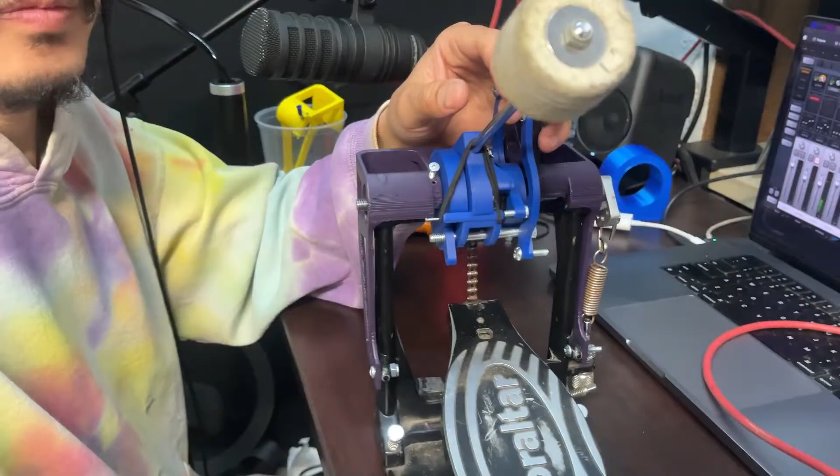Hold on, let me get further away here. So when you press the pedal down, the beater swings forward and hits the skin of your drum. And on a regular kick drum pedal, if you hold your foot down, the beater stays pressed up against the skin. That's not a big deal, but it does kill the resonance of your kick drum, so if you want a big boomy sound, you need to practice not doing that.

It's called burying the beater, when you play and let the beater rest on the skin. And actually, as a drummer, I prefer burying the beater a lot of the time. It just feels better.

But what if you don't always want to bury the beater? What if there's a way we can make it so you simply can't bury the beater? It turns out a piano key does exactly that.

When you press down on a piano key, it launches a hammer forward, but allows the hammer to bounce back after it hits the string. That's why when you hit a piano key and hold it down, the note sustains, and it's not until you lift your hand off the key that it dampens the string again.

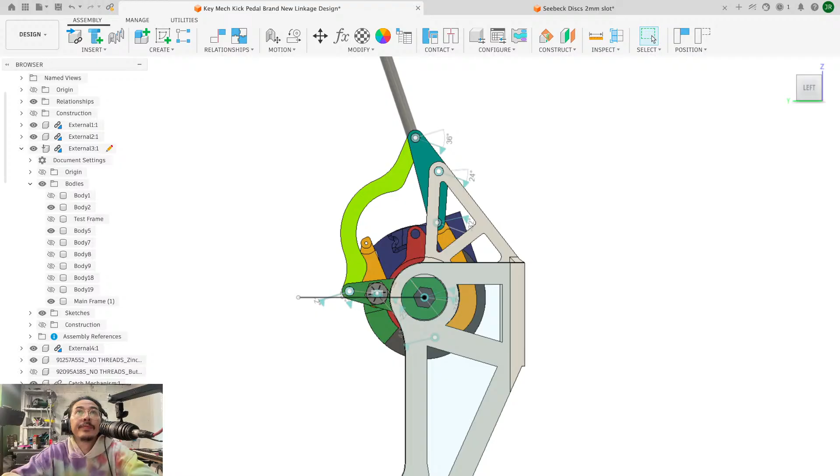Okay, so this is our mechanism. I think I'm going to print all the parts in different colors so I can refer to the colors when explaining it. I think that'll make things really easy, but I want to pick colors that look cool. I don't want to just do random colors like this. Like I feel like red for this makes sense. Anyways, so the first thing I need to do is dampen this guy.

I think literally all that's happening is this guy's just bashing into there, so we just need to put a little bumper on this.

Oh, and actually while I'm here, I can show you - oh my gosh, so messy. I'm still in the middle of cleaning all this, but that's the new printer station, that half of the room now. That used to literally just be garbage and stuff I would trip over. But now that's going to be a new manufacturing station, so all the printers are going to kind of live over there. I might keep one behind me at all times, but that's going to be the major workhorse part of the shop. And then we have the laser there and everything too. There's a little cubby here where I have another printer, but I'll probably put maybe a filament closet or something in there. But yeah, it's coming along. This desk is so nice, I'm so happy with this. It's super, super sturdy, it's got a stone top, so having all that mass underneath is really helping with keeping things stable.

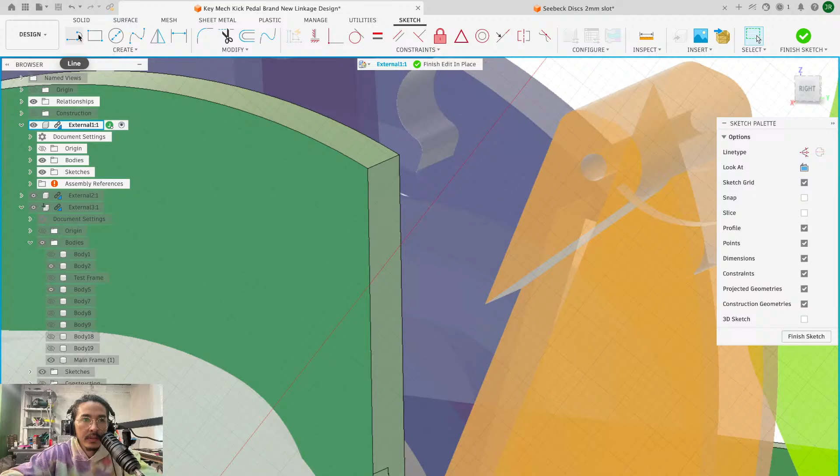Okay, sorry about that, I got a little bit distracted there. So okay, there we go. So I basically want to just add a pad here, but I don't want to just do a straight up thing. It kind of has to be... I want to do something that looks good too.

That's one of the things I've been really working hard on, trying to make things look better, because I feel like my designs have suffered in the past, or my videos have suffered in the past because of things not looking that good, which feels dumb, but I get it.

So, thinking, why is this in this shape anyways? I feel like this shape is actually kind of dumb. It doesn't need to be like that. Realistically, this could just be parallel.

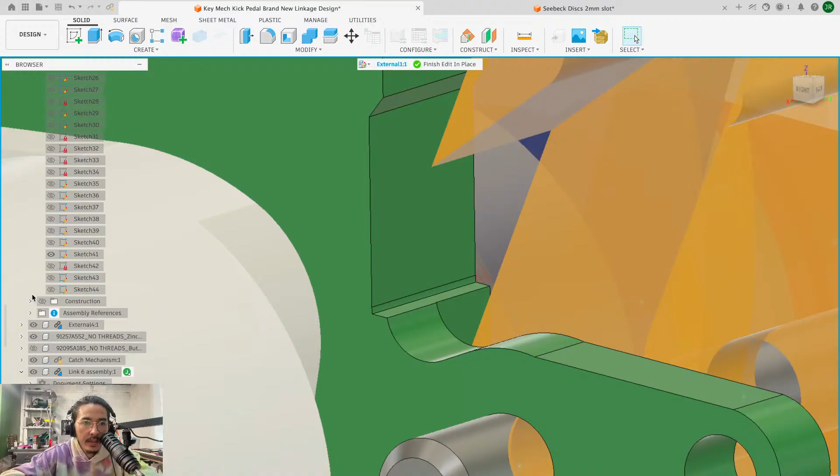Oops, what? Oh. Huh. So confused, what's happening here? Why is my sketch not showing up? Oh, oh. Boom.

I need to get better at this. I need to get better at this software.

Okay, we can pull that back. Feel free to keep chatting.

Sometimes when I'm working on this stuff, I forget to talk. So, I obviously want this to be fun to watch. Don't want to just be doing this.

Dun, dun, dun, dun. So I'm kind of thinking something like, oh no, I need that corner to be - I mean, literally just basically, I'm thinking about just making this little nubbin soft.

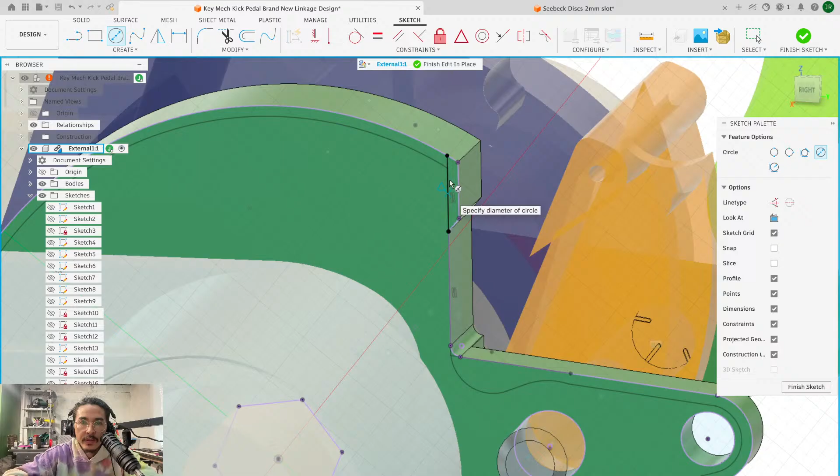Maybe we do something like that. So it's going to be this whole section, and we can tie this in with... actually, I should make it almost removable, shouldn't I? No, let's print it all in one. It's easy enough. So if I extrude...

Okay. And then I extrude this again to there, make that a new body. And then change the color of it to red. So there's our first pad.

Now, what I was saying before is I think I need more than just a solid pad, because my soft material isn't that soft, and it prints flat on its back. So I think I'm going to add maybe like ribs to this.

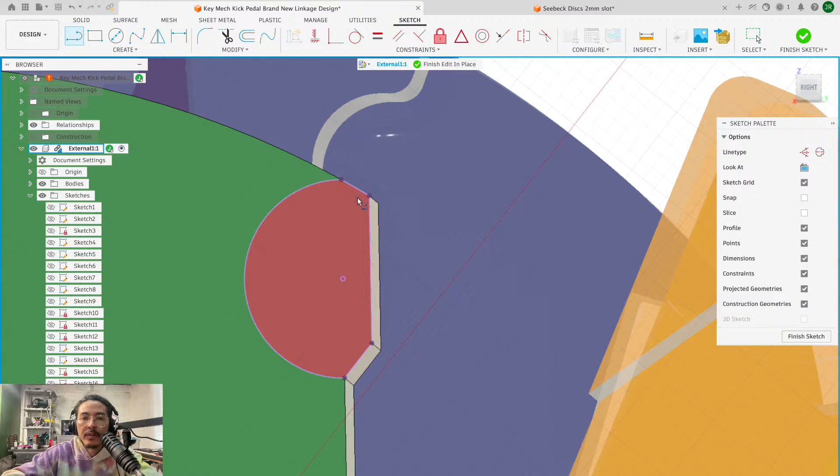Would it maybe be better to be modular so you could try different things instead of having to reprint the whole thing with multi-material? It would be better, but I want to demonstrate the multi-material printing. That's one of the benefits of doing this - I can show off the multi-material capabilities. And this piece prints in like 15 minutes anyways.

Obviously with multi-material it would take a lot longer, but I think it's worth it to demonstrate the capabilities, and I want to experiment with how this multi-material stuff works. But in the real world, I would totally make this a separate thing that slots in so I can change the pads, and redesign this later. Actually, you know what? Let's do it - let's make it so it can slot in. I'll still print this in one go, but in reality I'm going to do this in two separate pieces. This is Fusion 360.

I like it, it's not free. I have a hobby license that I think was pretty cheap - I honestly don't remember how much it is. I think it's like $50 a year, but that only lasts for 3 years, and then after the 3 years you have to get the pro version, which is insanely expensive. It's something dumb like that. And they changed it - it wasn't always like that. Fusion 360 used to have a straight up free tier that anybody can use, and then they took that away.

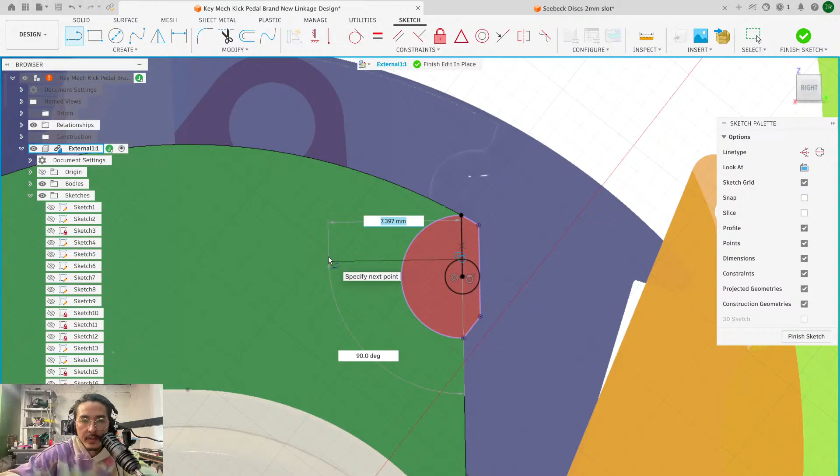I'm thinking about doing kind of like - I want something that looks cool, you know what I mean? Like that looks kind of cool to me. I was thinking about basically doing something like this. Something like this. And then something like this, maybe. And then something like this, maybe. This all makes sense in a second, I promise. And then something like maybe that. And then something like this.

Holy cow, stop texting me. I have a real estate agent that texts me all the time. Okay.

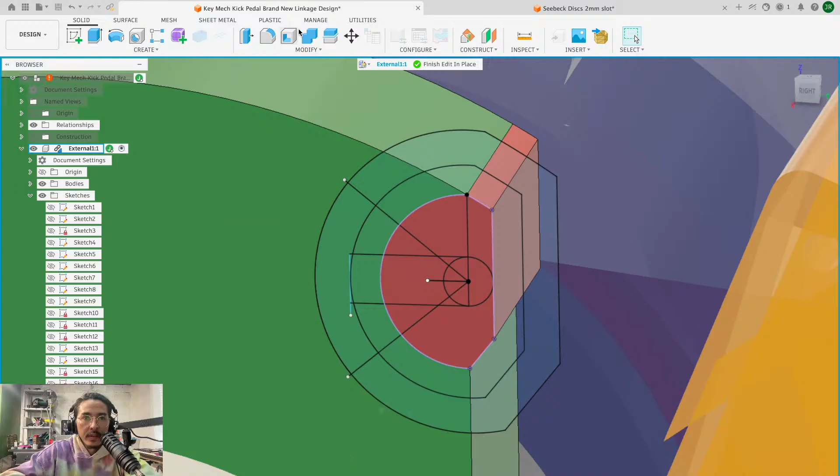This might be dumb, but we can try it - we can always change it if it doesn't work. And then combine this with this. Sketch away, so something like that. And so obviously that should be able to slot in and out.

Let's do a - let's start with minus 0.5, like that, and then maybe come straight up here. And then like 0.7. And then, I don't know, that I guess. And like this and this, like that. And then this.

Wait, actually no - but that's kind of the shape I'm looking for. Let's take these. Oh, that does not work. Okay, that's okay. So we're going to come forward with that. What's our distance between these? Ooh, 4.565 mils - that's a dumb amount.

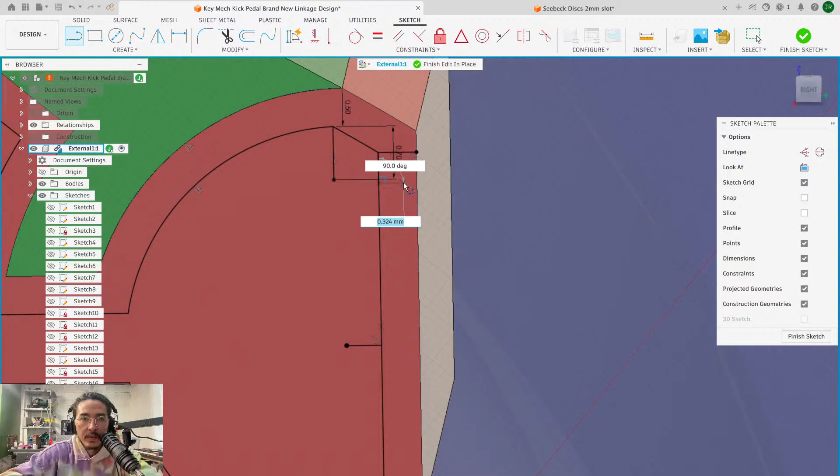.56 mils, hey? Well, let's create a rectangular pattern.

Hello, mother-in-law. Common guests on this show - my wife and my mother-in-law. Very sweet.

So what was it, 4.565? Oh, but minus. That doesn't work. .65? Oh no, 4.065? Okay, I'm just going to eyeball this because let's be honest. .16, I guess. Okay, and then let's do 7 of them. Okay.

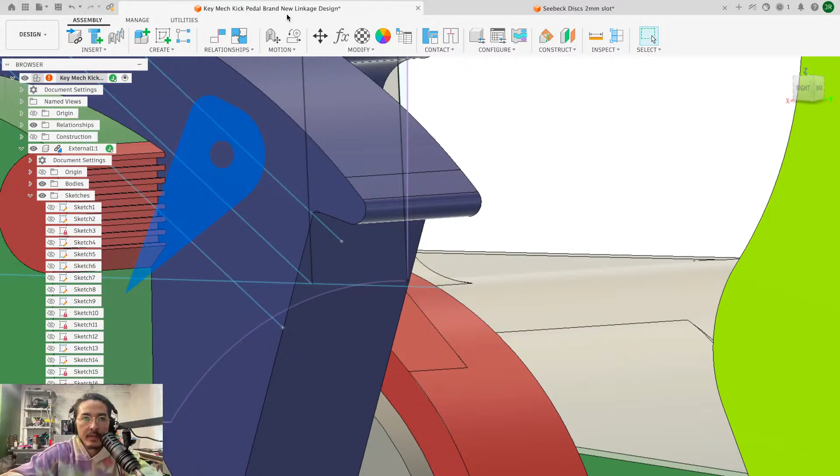One of the things I wanted to try with this was just really reducing this as much as possible. So one of the things I was thinking is first let's fix the jack. I think one of the things I'm going to do is just get rid of the chamfer altogether. And maybe make this - oh. No, okay, never mind.

Maybe fillet this, like that. Okay, so now we just have a really sharp edge right there. Actually, we should probably keep it like this. Maybe I can do a little fillet on this. Yeah, something like that.

Okay, and then I'm just going to play around. What I'm actually going to do is... So one of the things right now, this guy bumps into this screw, and I want to play around with that.

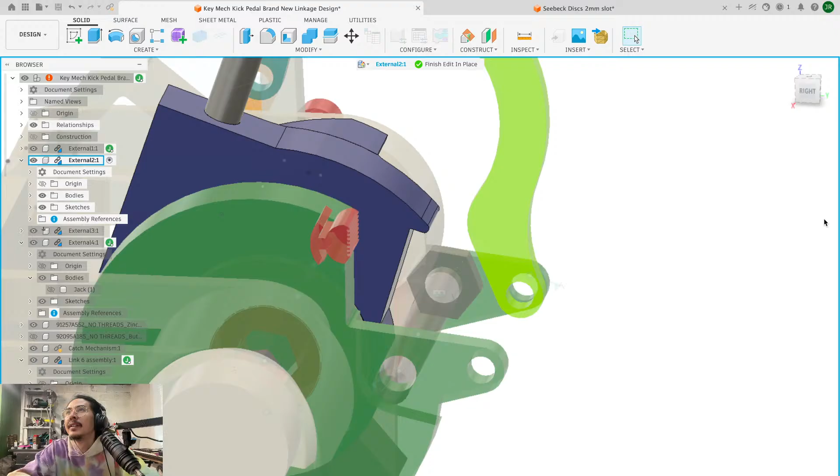There's my wife. There's my wife. Is that a bacon? Is that a bacon? I can't tell what that is. It looks like a bacon to me.

So yeah, what I want to do here is I want to actually grab this, create a copy, move it out here, and adjust this a bit. So let's bring this in. It's not going to let me do that. Okay, great. Love that.

Can I get rid of this? Yes. And just add a fillet here. Let's make it small, right? Let's see what just making it small does. Tiny little guy.

And then, in order to make it maybe not bounce back as far, because right now it bounces back and hits the screw here, I guess what I can do is just print a TPU bumper that goes on the screw. Then I don't have to change this at all, which is nice. So maybe I'll do that.

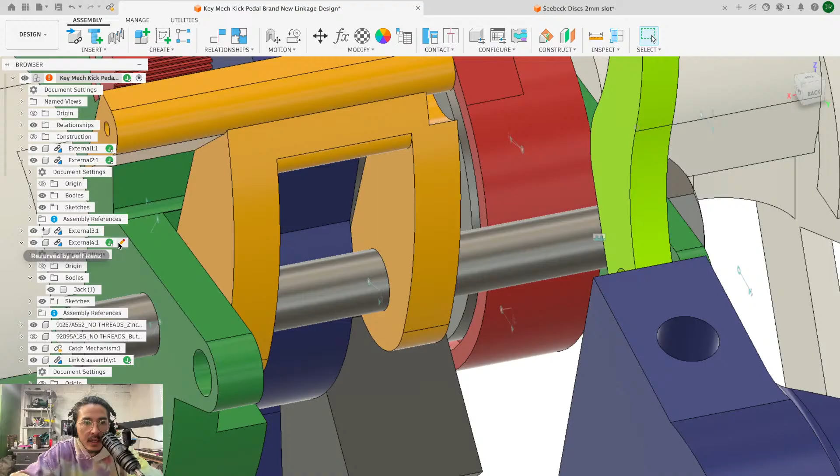And I'll create a sketch here. I'll project that. Let's make it maybe 10 mils.

Can't really do that because the actual thing needs to rotate. Okay, so I can't do it on the bar. Well, actually I can. So here's what we're going to do.

We'll do another multi-material thing. Just, you know... no, that's going to print dumb. That's going to print dumb. I don't want to do that. Okay, we're going to not do it on the jack.

We are going to do it on this guy, because the bolt sits right up against this. It's real close. So I can't add anything to the bolt because it'll get in there. But I can add stuff here, at the point that this actually contacts the bolt.

Let's hide some of these sketches. These sketches are getting a little unruly.

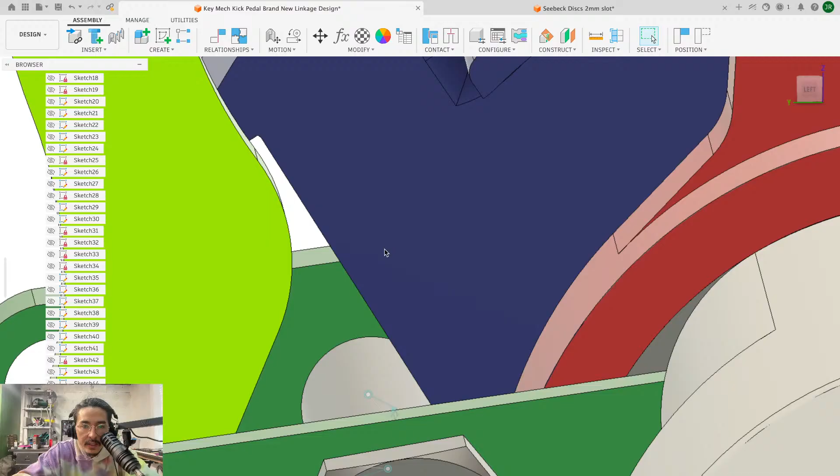Okay, so the point that this jack, the point that the jack actually hits the screw, I can't see. Or the point that the butt actually hits the nut, or the bolt here, is right there. So that's back pretty far.

And at this point in the stroke, we would have basically hit the beater already. If we moved this forward slightly, okay, let's actually go to here, which is where it re-engages. So we can pull this forward, maybe to there. That's probably a good amount.

So, what's our distance here? 2.362 millis. Kind of downward. So if I did 2 mils perpendicular out from there, that's probably pretty good. I mean, I'll do 2.2 just because I could probably do a little bit more than that.

So we'll sketch here. There. Okay.

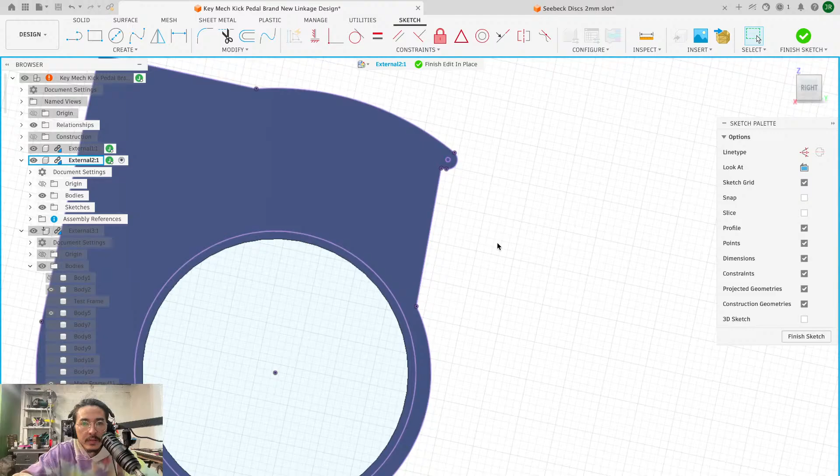Okay, so that gap. Nope, that's not what I want. Okay, I'm overthinking this. We can kind of just make an educated guess here. At the point of contact, it's going to be right there-ish.

So let's put a nice little bumper on this. I think I could probably do just a little circle here at like 4 mils.

You know what? I'm going to do something a little bit crazier here. So I moved that. I'm going to drag.

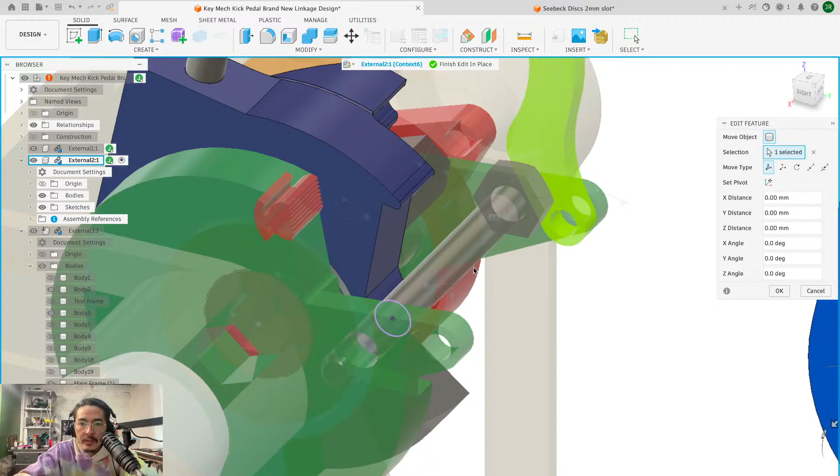So I want to do a sketch on here. And I want to project that there. And then I want to go to the move. And I want to also select. Okay, I can't do that.

So let's go before the move for a second. And I want to extrude this out here. Okay, and now when I go to the move, I will also move that there. Now you can really see where that's gonna be.

And if we sketch here, project this, get a circle there, now we can see exactly where it's going to be contacting. In fact, yeah, and then if we go like this and just take a random point here, we want to come out 2.2. And then come straight down.

Okay, so that's where it's going to contact. So it's like right at this base point. So what do we want this contact point to look like? I feel like it doesn't need to be that big. And we can probably do something

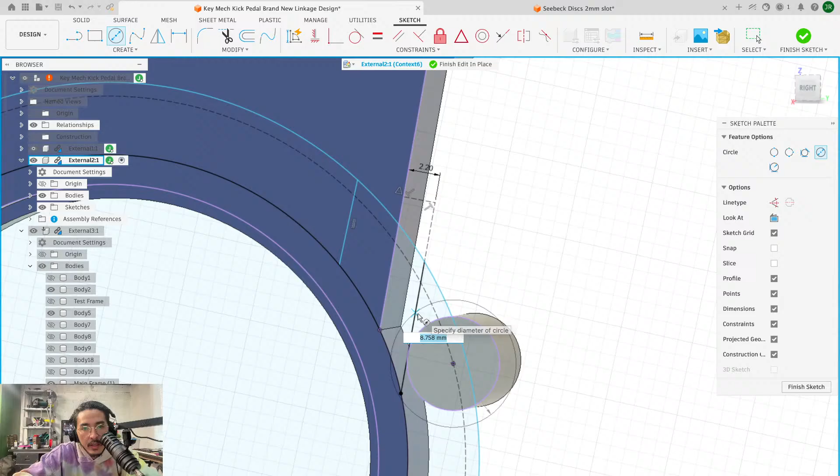We actually don't need this straight line because I think I want to make it cup this, kind of cradle it almost, because I think that'll be quieter. We can try something like that. So something like that to grab it, you know what I mean?

And then to lock this in, well, I think we can do something. Oh, oops.

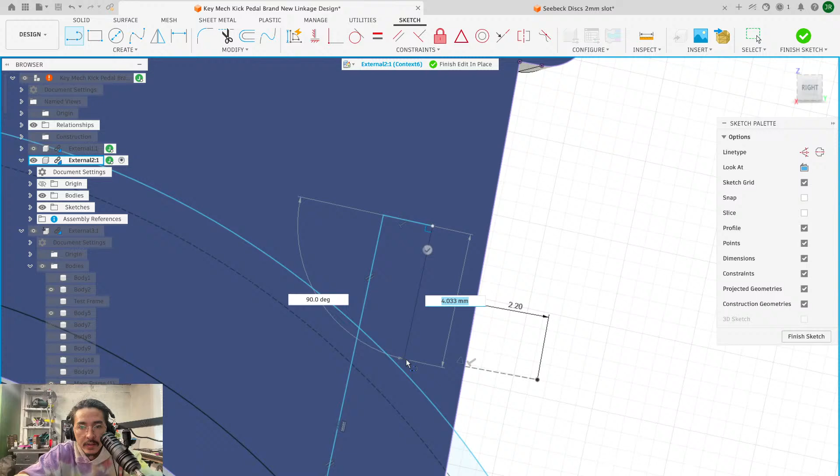I mean, I can literally just come up a bit, come out a bit. Looks a bit crazy, but what does it look like when we add our bumper?

Okay, and then I think to make this properly quiet, we can just do like this kind of deal. So that'll absorb a lot of that energy. That'll really kill the momentum, which is what we want. Right, we can try that. That's a nice little bump.

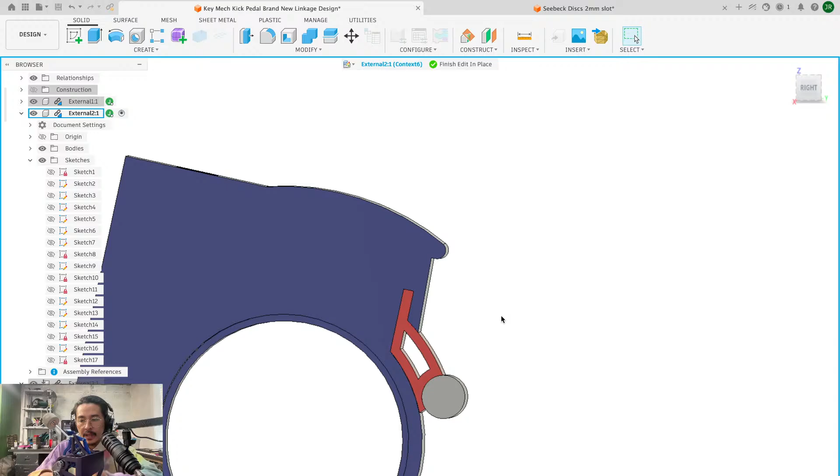I feel like we are going to be getting a little bit of noise from the jack hitting there as well, because... No, actually we shouldn't, because it doesn't actually ever hit that. Yeah, we're good. We're good there.

Okay, so this one's done. And then when this guy, when the red guy engages with this, I kind of want to be able to adjust this. So I'm going to delete these fillets.

Oh, what am I doing? I need to be doing this guy. Come on, you got it. You got it, dog. You got it.

Instead of... wait, how do I get rid of this chamfer without just deleting this whole thing? I guess I can go with a sketch on this, project this.

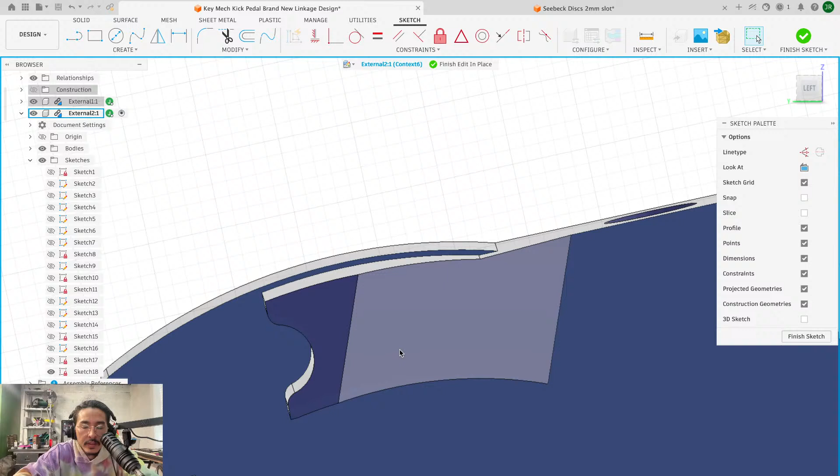Okay, and then extrude this out to here. New body. No, I see what's happening.

Oh no, wait, I messed up. Project this. I want to carry that circle. There. And then we can finish this sketch, extrude this and this out all the way.

And I'll create another sketch. Oh, my neck.

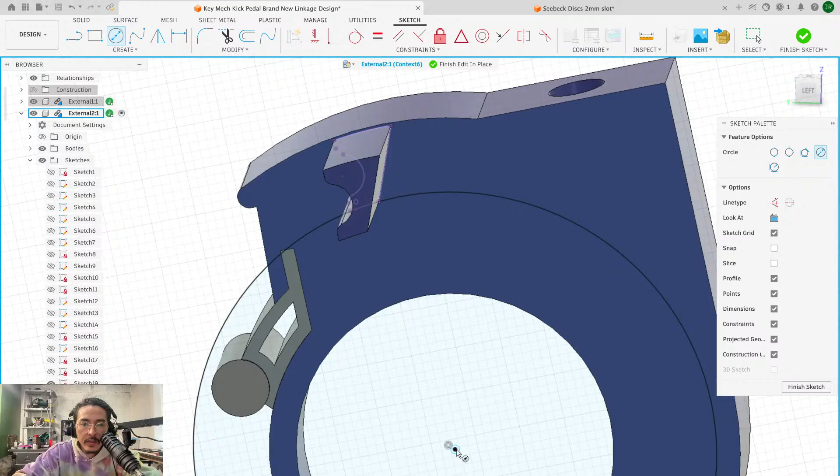So I think what I'm going to do here is make this one piece.

Oh, shoot. Oh, something hit my roof.

Okay, so this will be a bumper as well. Boom. But we will use a screw to be able to push this forward and back. But how do I use a screw to push this forward and back along this arc? That's what I need to figure out. Maybe...

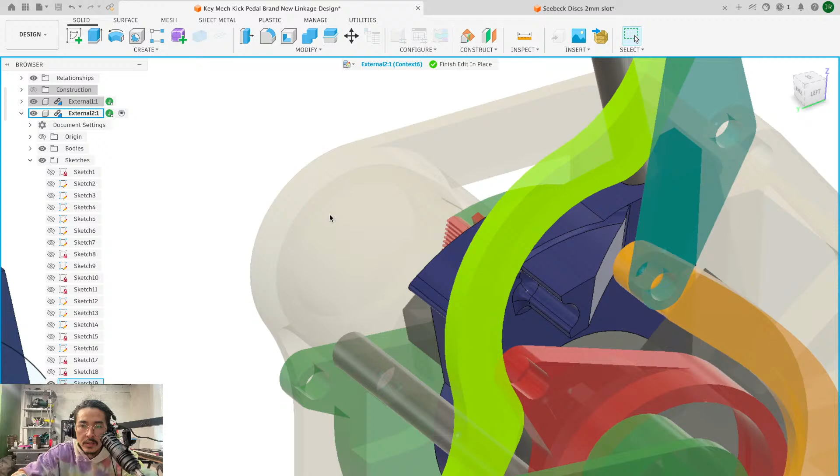Actually what I can do... oh, this is gonna be nice. This is gonna be nice. So I'll do, yeah, this is gonna be really cool.

I'll sketch on here. Let's project all of these things that I did already. I'll create a little track in here. 4mm track. What's this distance?

1.8 versus this distance, 2.1. So if I make this just 2, oh yeah. Oh yeah. This whole thing is gonna be...

Okay, and then I take this and I go like this, and I go and extrude.

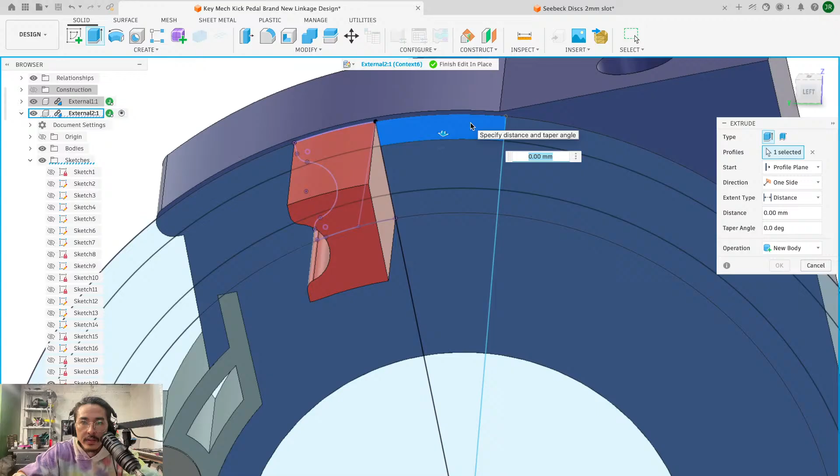Come on, let me select just one. Yeah, there we go. There you go. There you go. There you go. And I extrude this out. Let's do it, 2 mils. New body.

Wait. And this. Actually, how far back does that go? That one goes really far back. Okay, so we can change this angle to that.

Finish. This. Target body, tool body, remove, keep tools. Okay.

This is going to make sense in a minute. Boom, boom. Then we take this whole circle, extrude it. We go minus 0.5.

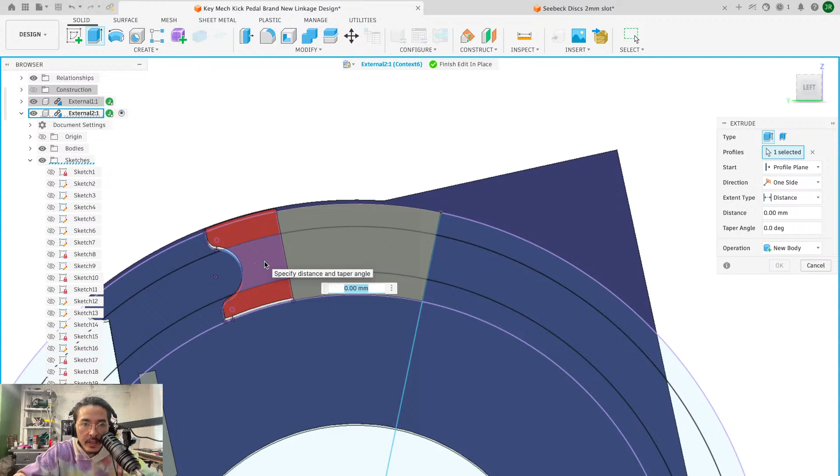Should I do minus 1? Let's go minus 1 on that. And then I take, and then I go extrude this, and, oops. This, and this. And then we go minus 0.8 or 0.9, I guess. New body. Okay.

And then I go like this and extrude this out to here. New body. Okay. Oh, shoot. Sketch on there. Project this and this. Extrude this out to here. New body. Combine these two. Boom, boom, boom.

Throw a little fillet. Oh, wait. What? Combine. Boom, boom, boom. Don't keep tools. Okay, there we go. Do a little fillet here. Do a little fillet here.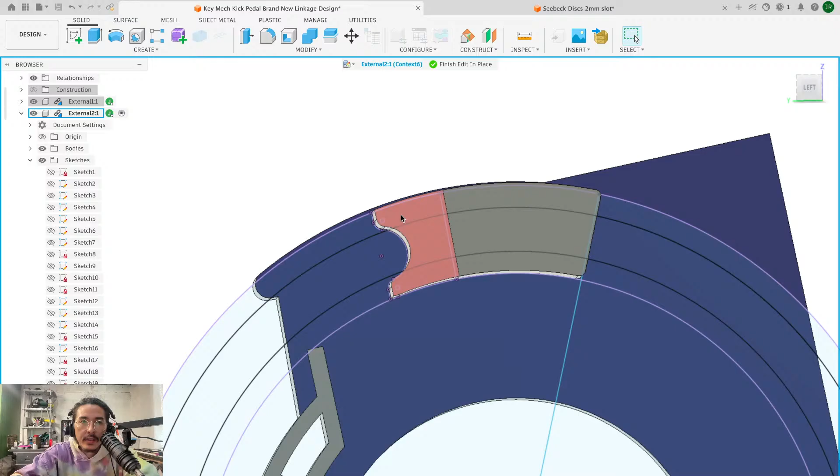And then we do a sketch on here. We draw a line up from this point to, I guess I should do this to here, and should be 1 milli. Nope, 2 millis.

Yeah. And then we go like this. And we go 4.7, I think. And then we go like this, 4.7. And then we go like this, tangent, and this, tangent,

Finish, extrude this, to there. So now we have this slot. So I'll be able to send a screw through, and I'll have some adjustment in this.

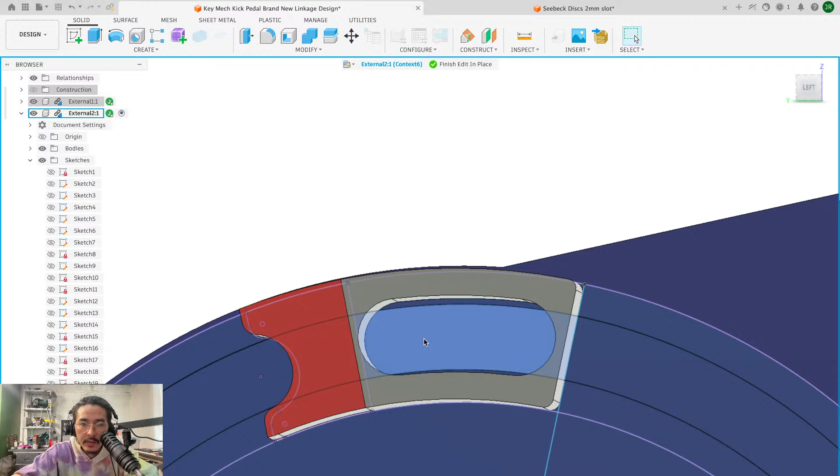Oh. Oh, I should have gone all the way through to there, but I don't want to cut. Oh yeah. Okay. Did that work? Yes. No, it didn't. Because I need these two to be combined, which I haven't done yet.

Nice. And then we can go and extrude again. Take this circle only. Go all the way through this.

So now I'll be able to send a screw through this guy. The little channel allows this to stay oriented correctly, and then the screw will hold it into place, and I'll be able to move this along this arch a reasonable amount. So I can adjust this, because we need to adjust this. This will be Multi-Material.

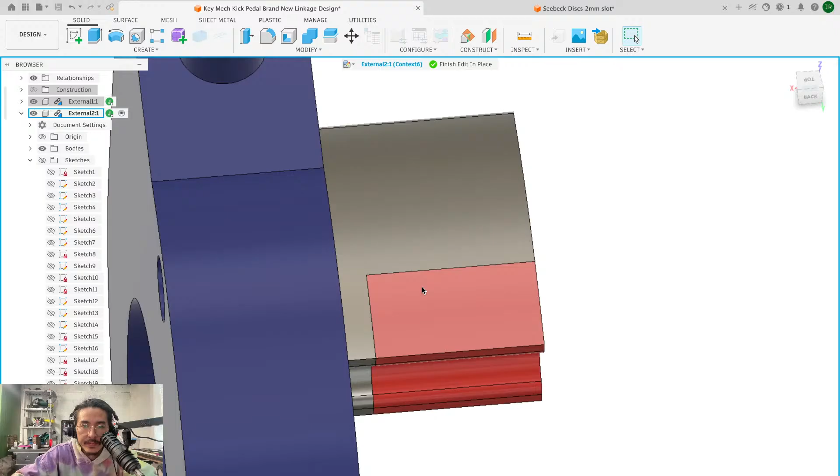This is such a small print, I'm not going to worry about making it perfect, you know what I mean. Can I fillet this at all? Is there any way I can grab that? Yeah.

Let's go 2, and then fillet this 2. Great, look at that, that looks fancy. Love that.

So these are separate parts now, but that's okay. Great, that's quite good.

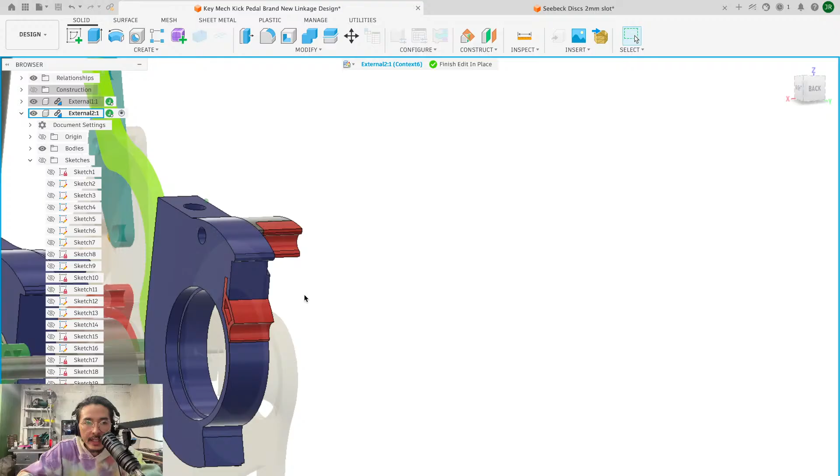And that's also why I obviously added all the ridges on this guy, so that there's a little less slamming going on. And this one actually slaps, that's why I did a bunch of individual ridges instead of... now I'm just realizing, how big are these?

Ooh, I didn't think about this. This is only 0.2 mil, so that actually doesn't work because my nozzle is 0.4, so the lines are going to be 0.4. So I need to change this, it's not going to work. That's not going to work.

So how about instead of that, we do kind of a similar thing where we go with maybe a 2-point circle. So I'm going to go like this, I'm going to go like that, and grab my 2-point circle. Come back a fair amount, like that. Finish.

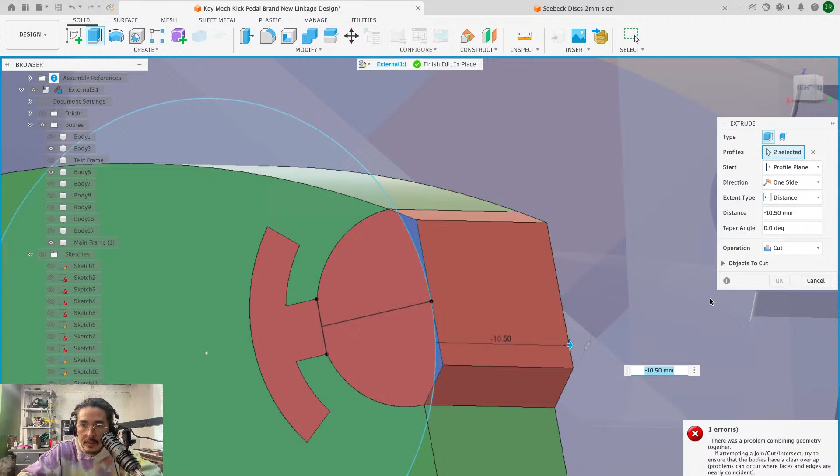Extrude this out. Okay, what to that point? Why isn't it cutting? Can I just delete this now? Yes, why isn't it letting me get rid of that? That's annoying. There we go.

Bean. And now we're going to create a sketch again. Project this. Okay, and then we're just going to go like this, and we'll go minus 0.4. No, minus.

Okay, let's just do that. And then we will go with a 3-point circle, because I don't know. Like that. Finish. And then let's just get rid of all this. There, that's gonna be fine as well. Okay.

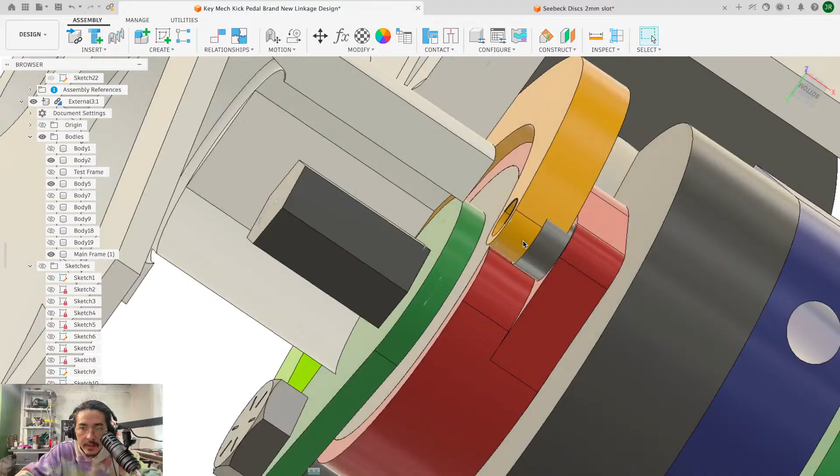So, what else we gotta do here, folks? So the other issue is this screw. I also really dislike... I guess I could just combine these, that could be one part. But the screw rubs into this.

So I could just cut out the frame. Yeah, I think I'll just cut out the frame. Literally just need to cut out like a mil. Okay, let's do that. Let's do that.

So, mainframe. Let's get rid of some stuff here, actually. So we're going to sketch on this surface, we're going to project this.

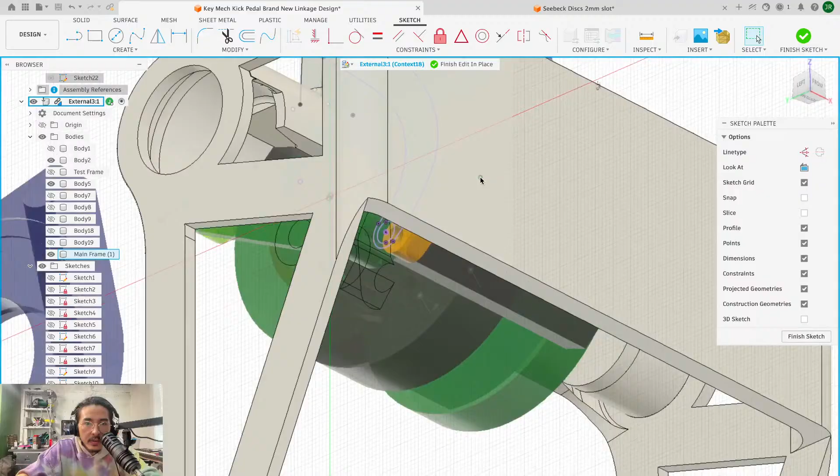Okay. So 9 mils, so we can make this 10. And then I can just go like this, tangy, tangy. Finish that sketch.

Realistically, project this. Thinking we go like this, make that 10. Finish. Can I isolate anything at this point? That would be nice if I could just isolate this body. No, it's so dumb that I can't isolate on this.

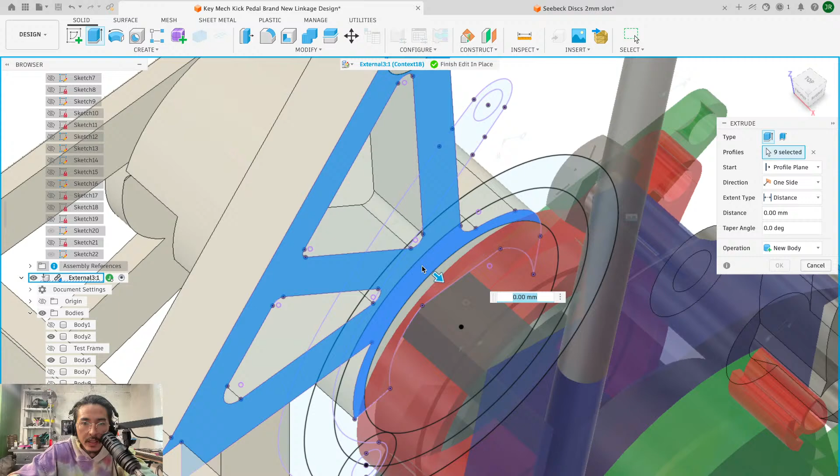A millimeter? Maybe even more, 2 millimeters. And then I'll add 2 millimeters here, just to keep the strength the same.

That looks dumb, why did that happen? Okay, that's fine, I don't need it to be. You know what, we don't even need this, let's just bring this back as well. It's better to have gaps. I don't know why I got rid of every gap possible. It's okay to have a little bit of a gap there, it'll make it easier to assemble.

Hang on, something sounds weird.

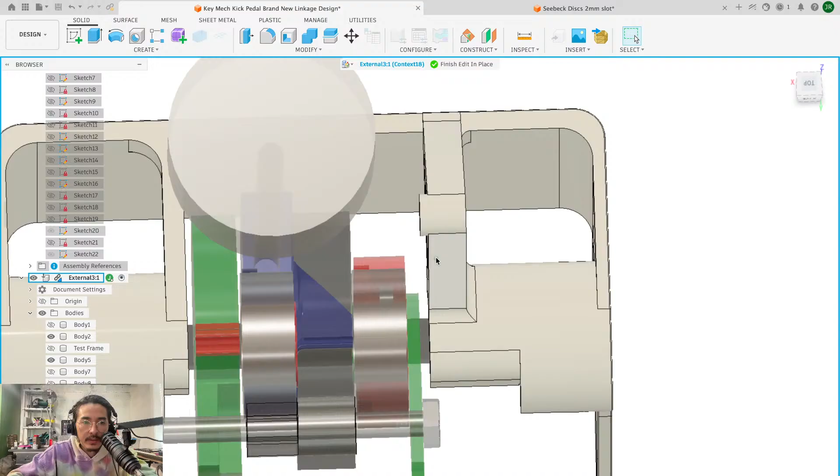Yeah, looks fine. Okay. More of a gap there. Great, I'm happy with that.

When you use this, you should make the beat of the song be Morse code. What would that sound like? That might be really cool, actually. Yeah, because I can do dots and dashes, essentially. That is possible, I suppose.

I might not have time to add the damper in this video. The damper might need to come later, which I think is fine. The damper should be pretty easy, and then that gives me an opportunity to improve this even further. Okay, so that works. That works.

So now let's start looking at these linkages again. This one and this one I'm going to combine. Link 6.

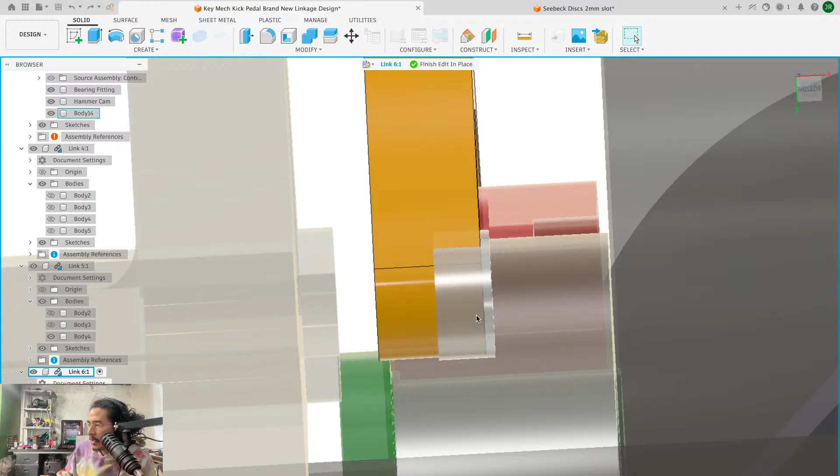Oh wait. Yeah, weird. So see how I have this guy here? I printed this tiny little spacer after the fact because this was way too tight with that. 3mm difference, and I don't understand why that was.

So maybe let's get rid of this, figure this out. I think I just need to move. I think this thing just needs to move over quite a bit. So let's move this back, -3. So now it's kind of more in line with our green guy. And we can get rid of this.

Let's get rid of this too, because that's confusing me right now. Yeah, that's a little better. And then let's just make this whole bar part thicker by 2.5, I guess. New body. Oops. Okay, weird. There we go.

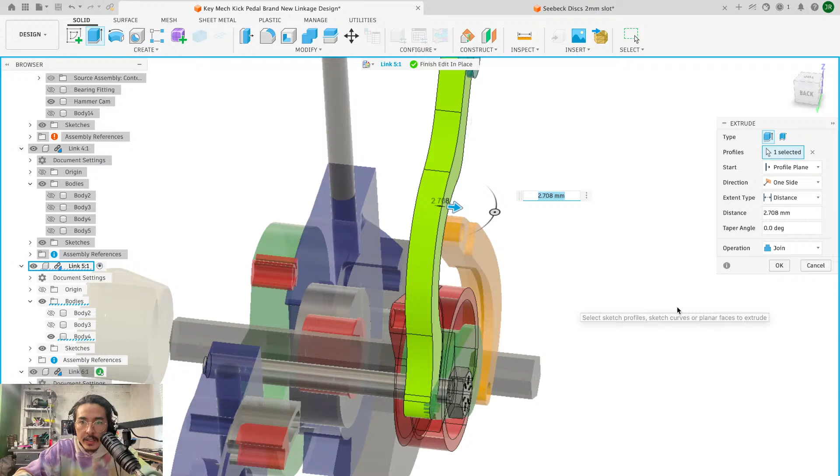Ultimately, I want them to be the same thickness, right? But it rubs there. So the problem I'm having is I want to thicken this guy up. And theoretically, it should be the same thickness as this. Oops, what on earth happened? There we go. Yeah, so now those are the same thickness.

But in order to thicken this up, it has to move over. And so just for the sake of... see, these aren't actually lined up in the model, but they are lined up in real life. And that's kind of a weird thing that's happening. Why is that happening? Well, it doesn't matter. I mean, it kind of matters, but... actually, yeah, why is that happening?

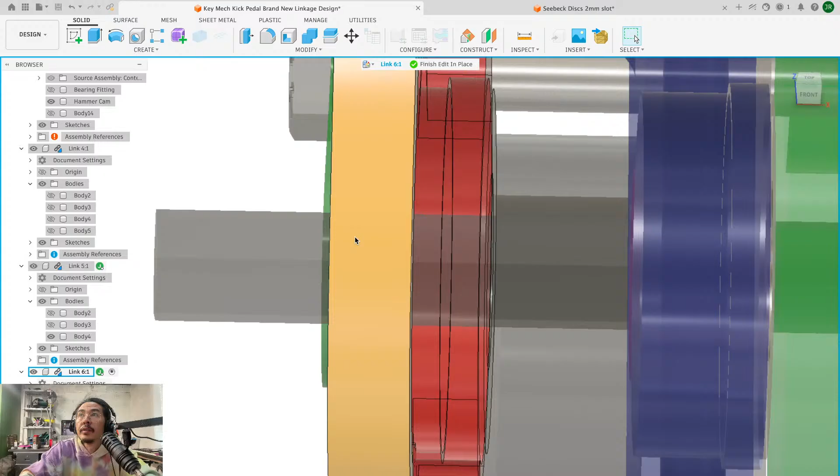I think it's just because there's little minor bits of twisting going on between these parts. So let's just shrink this back down again. How much was that? How much did that go down? 0.76. Okay.

Let's go minus 0.8, give it a little bit more room. No, see, yeah, see, it's still okay. This actually makes more sense. It's actually not good, so we need this to clear. That's what was happening, it was in real life - it was hitting the red part, and so now we're clear there. It wasn't clear before, so that was I guess my mistake. I don't know how I messed that up, but it's fine.

This is fine now. If we extrude this minus, and then just to make sure this isn't rubbing on anything. Actually, no, I want to print that flat. I'll probably put tiny little spacers between all of these joints as well. I'll just print a bunch, because they're all the same size, so I can just print a bunch of little tiny spacers, little washers basically.

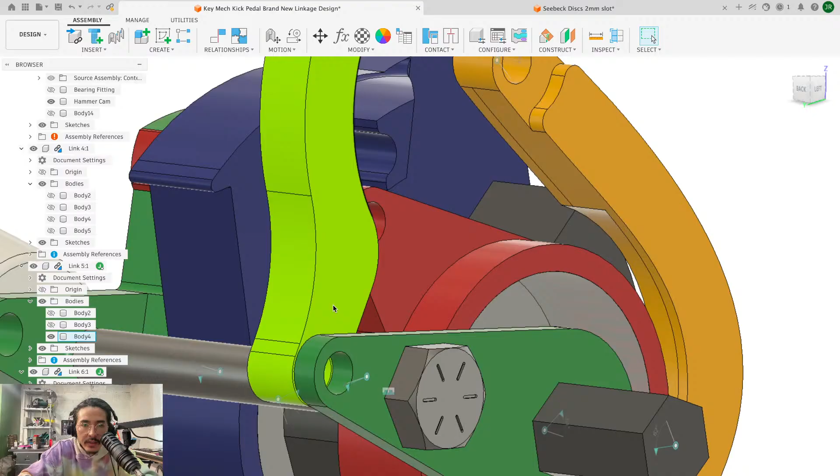Okay. Why does it keep zooming out like crazy? So those are lined up now. Okay, now the issue is when I made this guy thicker, now this guy intersects with it there.

So we need to cut away a bit of that. But I want to do it in a way that I can make this overall stronger, because this joint is really thin as is, and I'd like to make it stronger. The screw head is just slightly bigger. Oh yeah, and it also hits there too.

So this is the other issue. So we're going to kind of redesign this whole thing, I think. So the additional issue is that when this comes down, it intersects right there as well. So we can't have that.

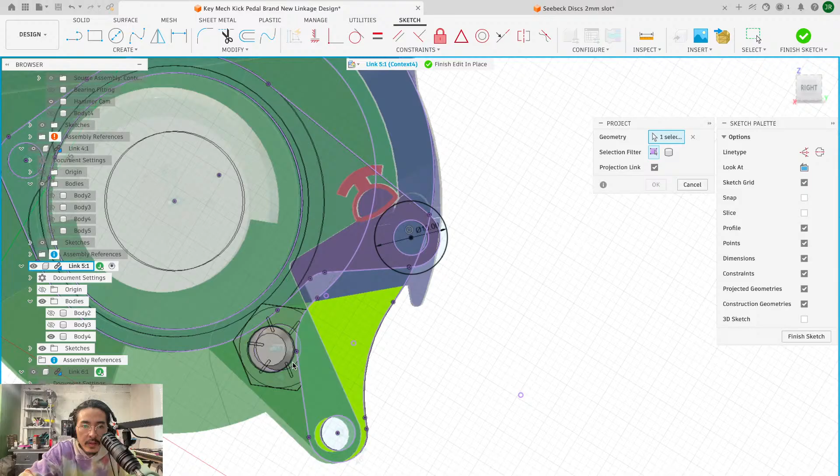So what is this? Link 5. Boom. Capture position. Sketch here. Let's project this whole thing. So we know the screw head on this is slightly bigger, so let's just be safe with this. Let's go with a 10 mil screw head. And then the bolt gets in the way there. And we can visualize that by going like this, and by going like this.

So I've got to cut away a lot of this meat, which is okay. I can just add it on the back side. So that's fine.

Hey, what's up? Nothing.

Are you getting the pizza oven going? Nice, perfect. You can use any of the wood that's out there too, and some charcoal if you want.

But the big issue is this. So if we look at this path... oh, that's actually not very clear, is it? Because that ratio changes depending on the motion.

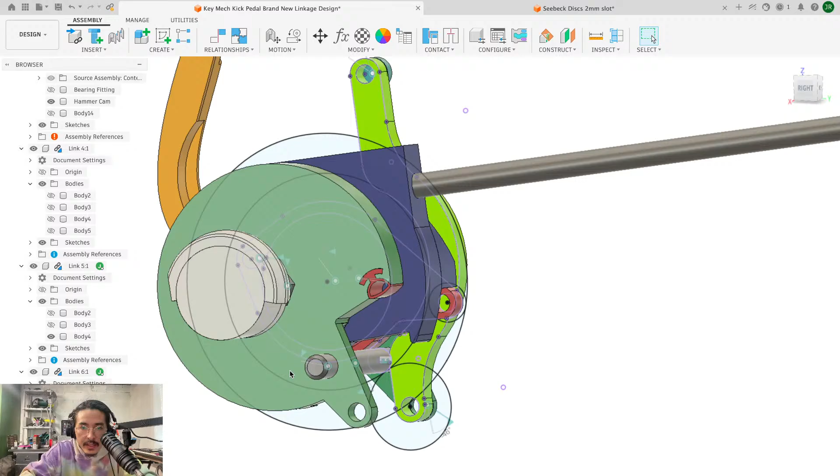So let's just do this for a second. I can visualize this as this. Oh yeah, so we can trace the motion. So we can see it contacts here. The red guy contacts the green guy there. So now I can...

I can create a new reference, capture position. Okay, we'll sketch on here, we'll project this. And now we can see exactly where it passes through. And we'll also project our circle there.

Finish, and then we'll do 3, and that'll give us 3 contact points. So when this comes down and through, and then we go like this, create a new capture position, and we project. Oh, and then we create a sketch on this surface and project this again, and project this again.

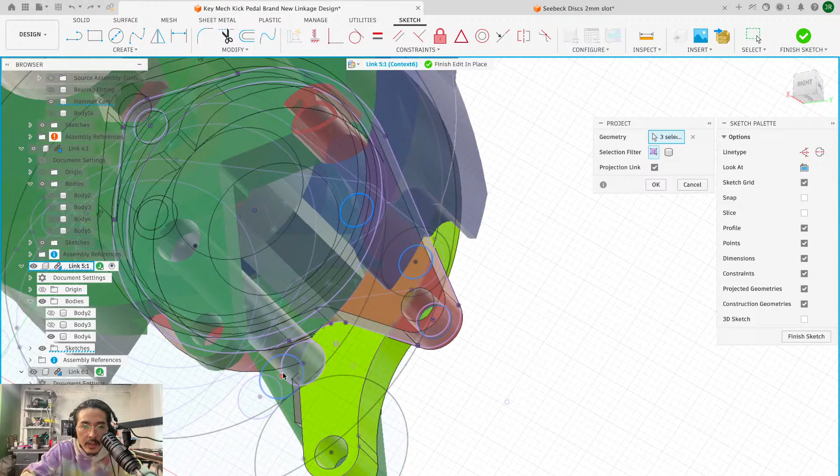I'm actually going to do this on the main sketch, and we're going to project that again. We're going to project that, project that, project these 3 circles.

Okay, and then we are going to do a 3-point circle, this one, and this one. We're going to project these 3 circles as well. Finish, new sketch here, project those new circles we just drew. Boom, boom, boom. And then we can go into our sketches and turn all of these other sketches off.

Okay, so as you can see, it'll never actually get down to this point. But once again, we'll project this and draw our 10 mil circle to represent the head of the bolt. And that 10 mil circle then carries through.

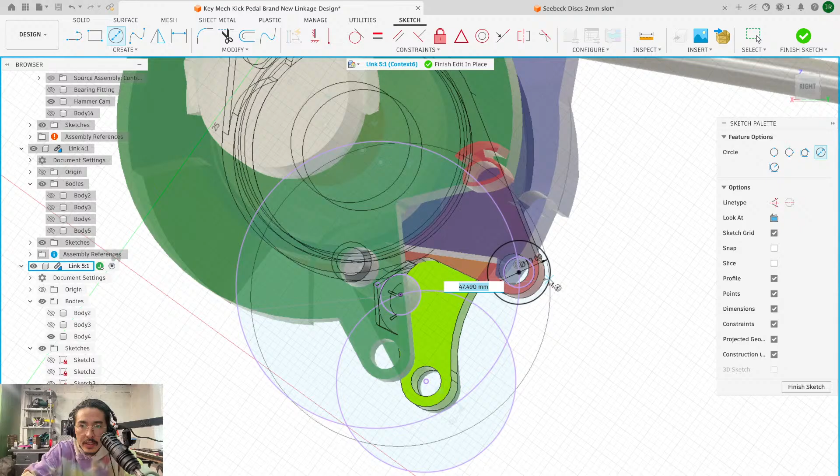I mean, I guess realistically I just need to cut out that chunk, and cut out this whole chunk, as well as the path that this bolt takes. Wait, what? The path that this bolt takes.

Okay, so if I finish this, now we can analyze. In our motion, we're watching for the red. As this travels up, you can see the red remains. It's kind of intersecting above our circle there, but that's okay, I'll just remember that.

But the bolt head, which is this circle, remains within that ring. Okay, good. And then this one, where the bolt interacts with this, yeah, we just gotta cut that out.

Okay, so easy peasy lemon squeezy. Lemon squeezy. Easy peasy lemon squeezy.

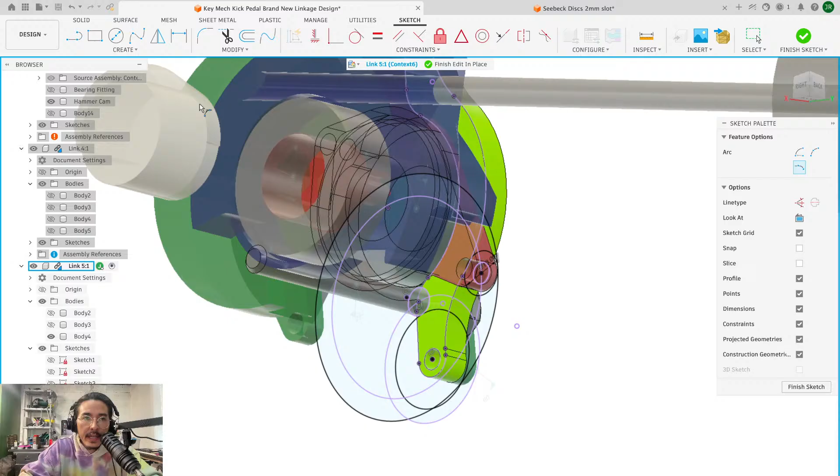How does a tangent arc work? I can't do it because it's not a full circle. Okay, that's okay, that's okay. We can start here and end up here. Can I tangent this to this? Boom. And tangent this to this. Boom.

Now that makes it huge, so let's shrink that down significantly. Okay, that works. And let's do another 8 mil there. And can we just offset this guy? Minus 8. Yes.

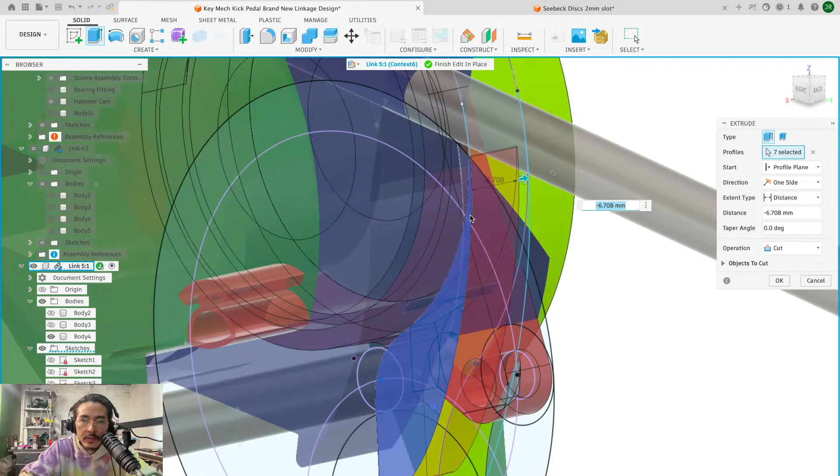Now if we extrude this, excuse me, to here. Okay, we've got a real skinny boy there, but that's okay because we've planned for this. So now we extrude all of this nonsense.

Here, okay, so that's our new link. Looks like a little banana thing. These look kind of dumb, but that's okay for now, that's okay for now, because we will be able to...

Oh, banana bread. Oh, okay Ruby, I gotta show banana bread. I gotta show banana bread. I'm just gonna show you on the webcam though, because I already took apart my whole phone camera rig situation.

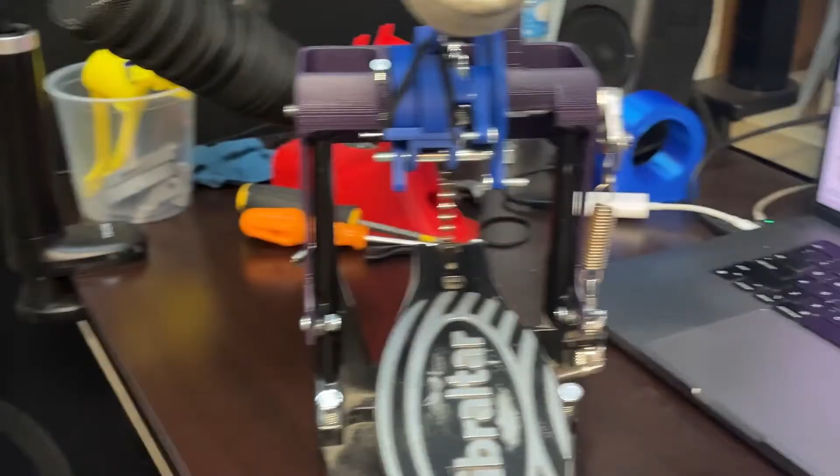Okay, you ready for this? Banana bread. Okay, super zoomed in, which is fine. Check this out.

So you can see the linkage works. And when we launch forward, the mallet falls back, mallet is now retracted. And watch right here, that pushes it up and re-engages. It works. It's not perfect, but it works.

Isn't that crazy? So what we're doing now, we're just beefing things up, making it a bit stronger. There's a few areas where screws are touching things that they shouldn't be touching. And there's also that loud click sound that happens.

And so to defeat the click sound, we've added in these. So this is the new hammer butt mechanism, or not mechanism, but the new hammer butt. Oh, hold on, this is so hard to deal with right now.

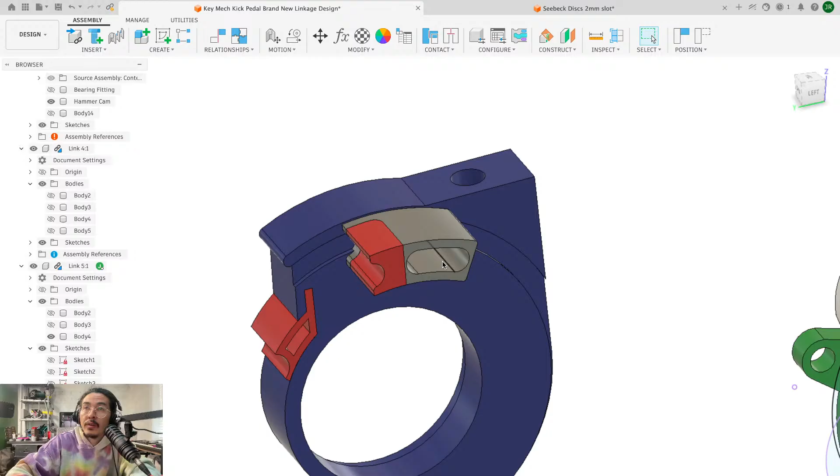I've made the point where the pusher engages adjustable, so now this can slide back and forth, and there will be a screw that ties it in. So we'll be able to adjust the point that it actually does its job.

Added this TPU bumper here, so that should stop the click sound we get. And yeah, now we're just making these beefier and trying to reduce any areas where it rubs.

Like this is a big area where it's rubbing right now, which I'm going to actively reduce. So right now the red guy collides with this. Why aren't you letting me move? Yeah, the red guy collides with this, so I'm just about to shave that all away.

So to do that, let me get this back down into its kind of lowest position here. Actually, I'm just going to undo because I had it set right. There we go.

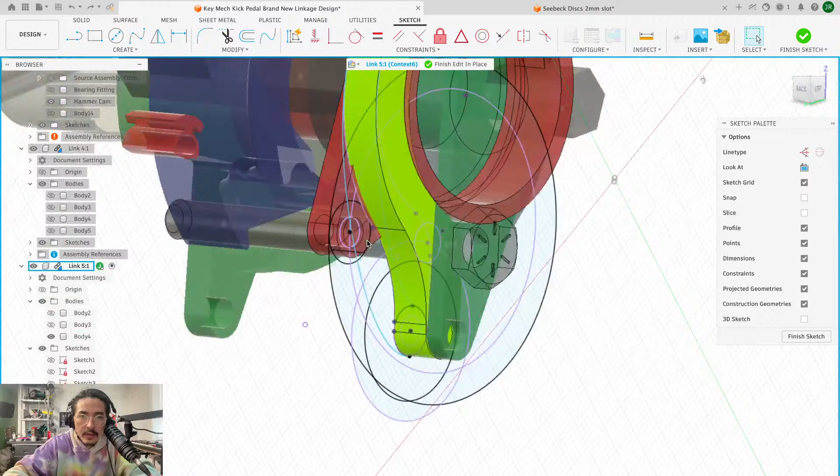So in order to do that, we just need to cut out enough of this. That should be enough there.

And it's touching there as well, so we're going to want to get rid of that, just to be safe. Like that's probably good.

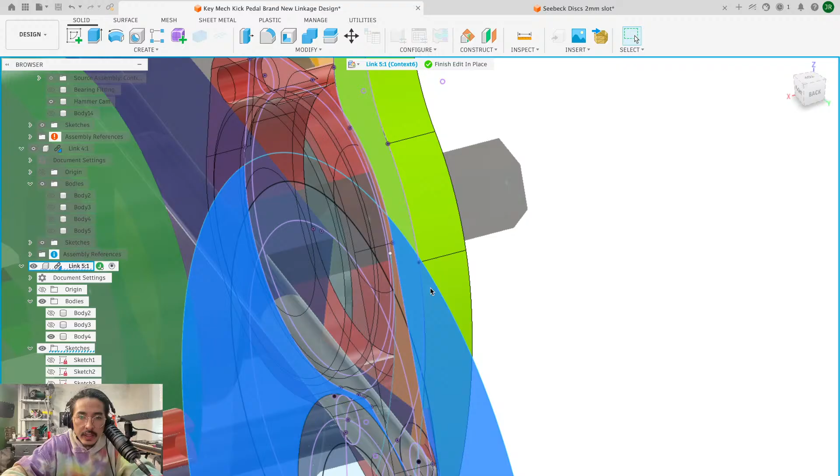And since we're sort of in the phase of just refining, I'm happy to be a little less careful here.

So we want to obviously cut out enough that not only the red part... okay, let's go -4 on this, I guess. So we're cutting out a lot, and I'm going to have to make up for this somehow.

So let's take a look, let's see what we got going on here. And let's just push this down this way. We got plenty of room up top.

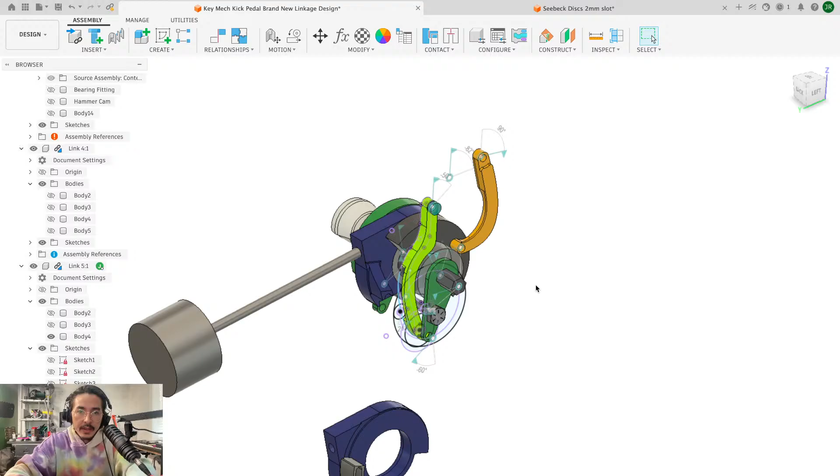Okay, so let me get rid of this crazy sketch and reintroduce our hammer cam. So now that's very clear. Lots of space for the screw head, but obviously this is highly weakened now.

So let's bring our frame back in and see, does this... Yeah, there's no situation where this actually passes in front of the frame. So I'm free to just add a bunch of material on the other end of this.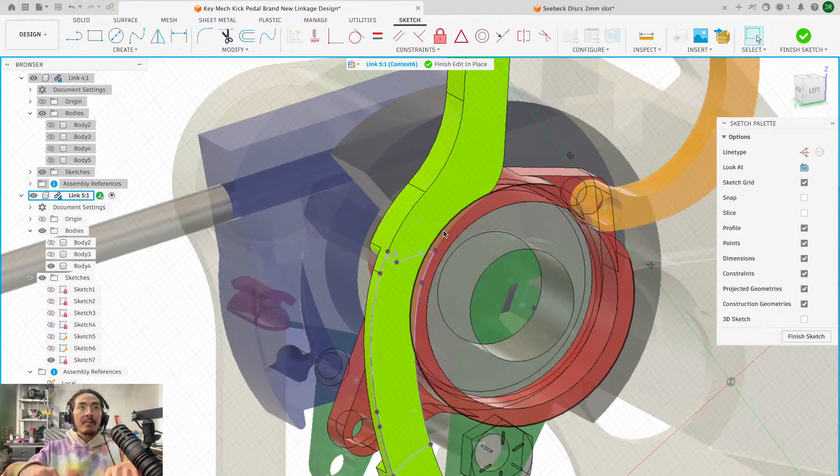So what do I want to do? What shape do I want to make this? Let's make it kind of look like it's going to line up with this at some point, but it never will. But that's okay. And then up here...

Hang on, where's our main frame? Oh, it's there, oh yeah, so we're good. Finish. And what did we do, 4 mils? Let's do 4 mils again.

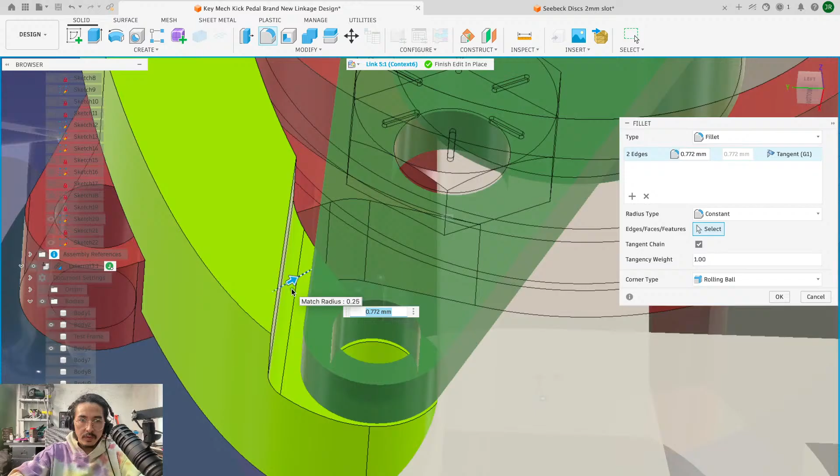Okay, doesn't look that cool, but at least it's going to be strong. It's going to avoid the screw there. So that's good enough for me right now.

And then the last thing I wanted to do was our link 4, this guy. Okay, so link 4.

Wanted to make this way stronger as well by doing this, doubling it up. These aren't perfectly aligned, are they? That's fine.

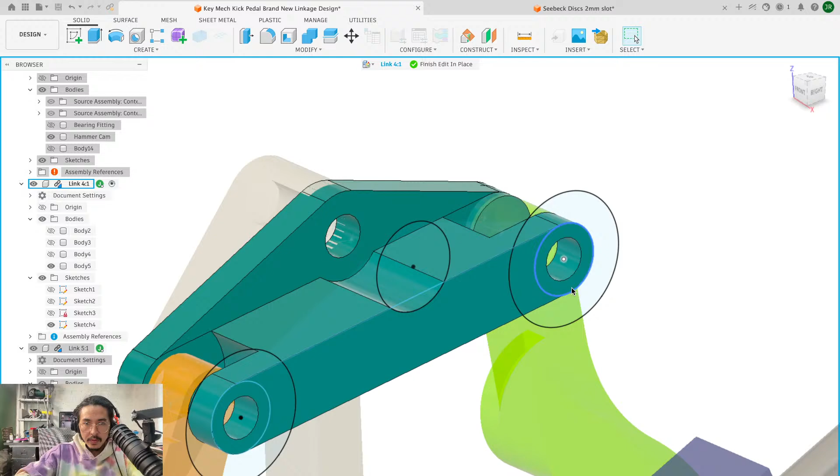I mean, it's strong enough, everything's strong enough, but I just want it. I'm noticing the screws are racking a little bit, so I'm hoping that'll kind of help with the racking. But here, I didn't want the screw to be out so much, so that's why I only have one on the top, because this is going to provide all the support.

But let's see if this interacts with anything poorly, because it might. So when this comes up... we're good. Oh, no, we're not good. Oh, we're not good at all.

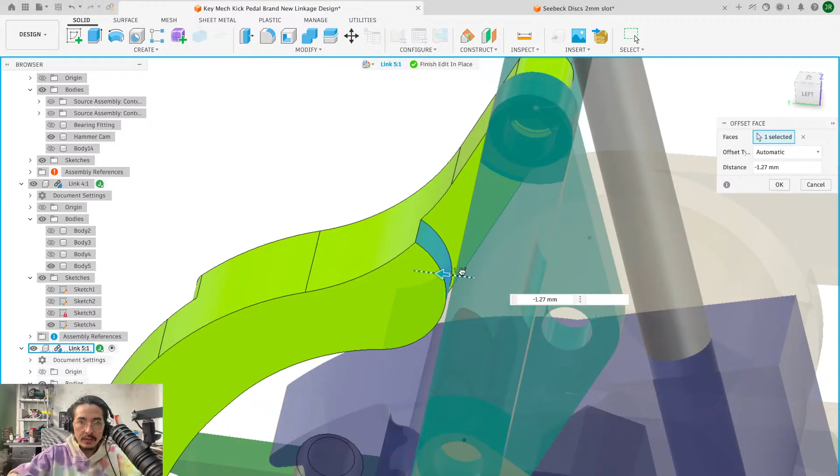So let's adjust this. Oh my god, banana bread. Those are fighting words. That's not what I want at all.

So this needs to change, so I've got to make room for this.

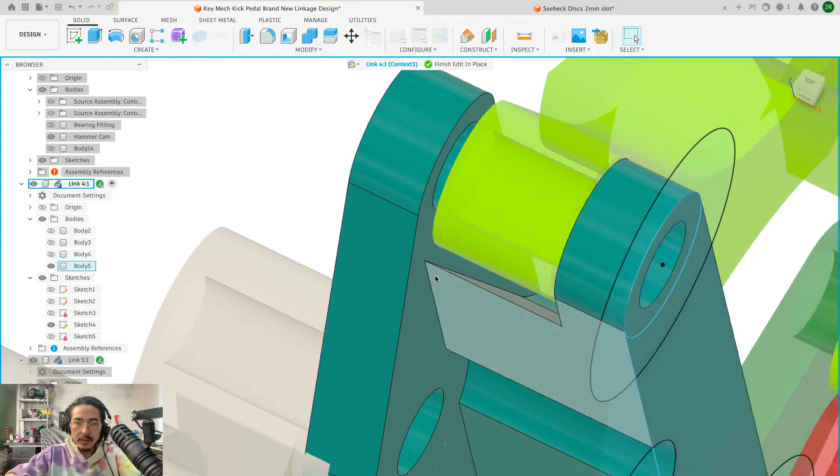Okay, now that's got room. Don't know what's going on here. And we're almost good.

That's right. What do they say? Never. What do they say? Make something about make sure your moves are unpredictable or something like that. What's that like?

Oh, see, my phone's dying. Okay, and then I just need to clean this up.

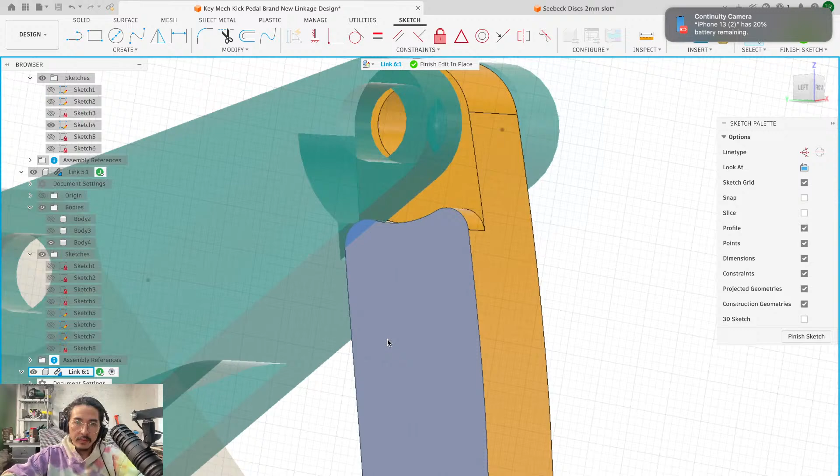Oops. Circle. Tangent this. Nice. Project this and parallelize. Zoom. Great.

Okay. That is that. So we've freed up our linkages. Things are looking free now. We've strengthened a lot of this.

Okay, I'm not really sure what is going on here. Doesn't matter. We've freed up a lot of this, strengthened it all.

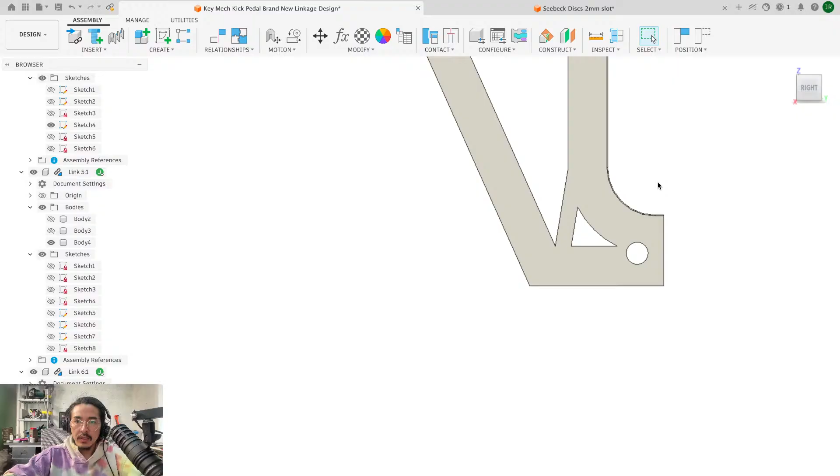The last thing I wanted to do, and then I'm going to go because we're doing pizza night and she's got the wood stove all burning up now.

The last thing I wanted to do, oh no. Where's my hammer cam? Oh, it's way back there. Oh, it is broken. There we go. Fixed it.

Right, so last thing I wanted to do was to make the jack.

Yeah, she makes some sourdough crust from scratch, and it's so good. And we're doing pierogi pizzas. So I'm a lucky boy. I'm a lucky boy.

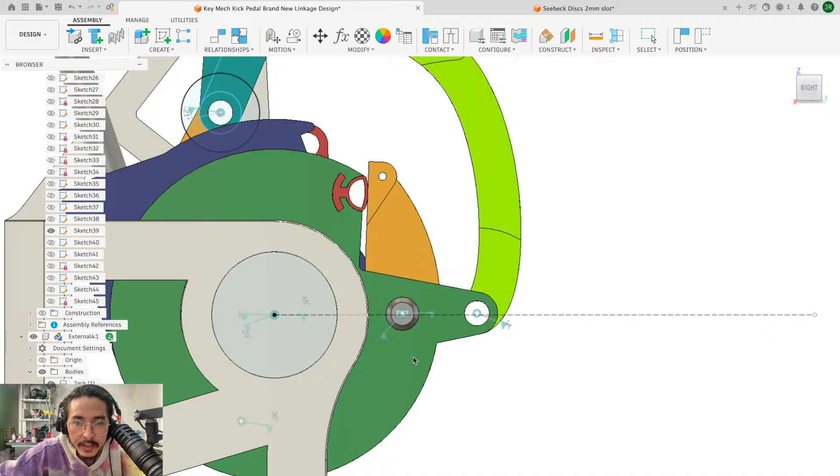One of these sketches. This one gives me the line where the jack needs it. Okay.

All good? Yeah. Yeah, I'm just about done.

Not gonna lie, there's a salmon pizza that is amazing. So I don't know, tuna might be okay. Pineapple, I like it. Relish, I like it. Ranch, love ranch on pizza. But plant cheese, that's where you lost me. You lost me on the plant cheese, but everything else, I'm open.

Everything else, I'm open. So, yeah, the last thing, I just need the pusher. I forgot to model that onto this version of the frame.

And I want to make it adjustable as well. And I feel like what I need to do is I need the jack to stick out more.

So just for the heck of it, let's pop this out 10 more millis. That's like so weak, but we have a lot of room on this side, so I can always beef that up later.

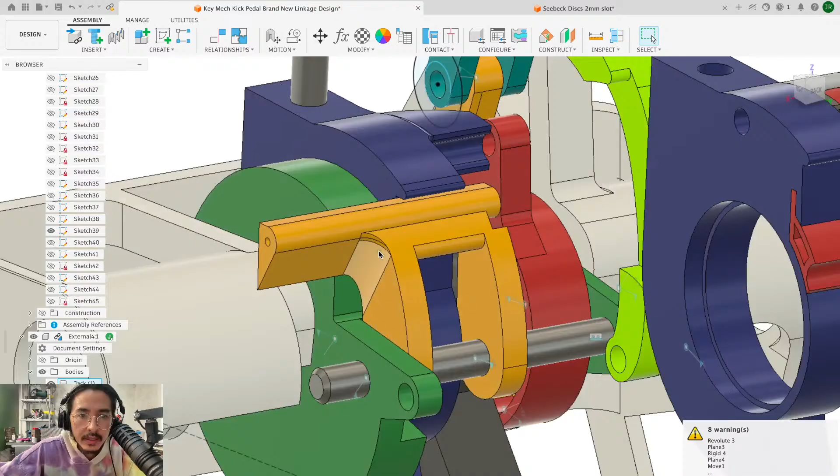And then for the actual pusher, I think I'm just going to do like a straight up guy.

Oh yeah, and this can come out all the way now because my bolt goes the other way. So

But anyways, I'm just gonna, what am I doing? I'm just gonna come out to the front here. No, I'm just gonna come straight down.

We're gonna tangent this boy. And we're going to perpendicular this boy. Oh. That's the worst, actually. So I'm going to get rid of my tangent boy and move this back.

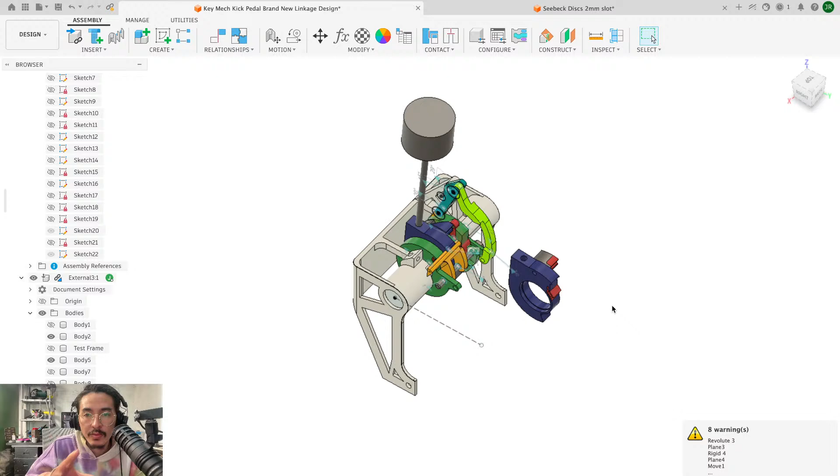I might mess around with these and make them look a little bit better. Some of these look bad, but we'll see. I'll print them first because we know at least the geometry is there. And then we can test out all of these different things.

And then once we do that, we can run another test, and hopefully this will work better. The big thing I'm banking on is that reducing the tooth size of this will help make the mechanism work faster, and having the adjustments here and here will also help, because I literally, to make it work today, I just drilled a hole in this and screwed a screw in. So there's zero adjustment there.

Okay. That's that, folks. I have some new discs printed for the Siren, but I'll show you that on Friday, as well as this updated pedal thing.